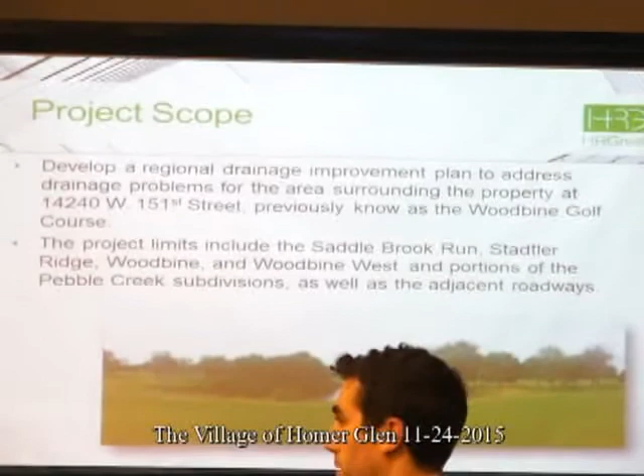So really quick, as a reminder, the project scope was to do a regional drainage study through the area surrounding the former Woodbine golf course. This included the subdivisions of Saddle Brook Run, Stadtler Ridge, Woodbine, Woodbine West, and portions of the Pebble Creek subdivision, as well as the adjacent roadways. So within the entire village, this is where we were studying, and more focused in, we're studying these subdivisions. It's important to note that these two streams here are part of the Long Run Creek watershed.

So as part of our project, we did a lot of background research to determine the extent of flooding, and just how frequently it was happening, how bad it was. We did this by meeting with village staff and the road district. We also looked at photos that were supplied by the village and road district as well as residents. We reviewed available topographic data to determine the areas draining into the study area. And then we also sent out a resident questionnaire.

I believe we sent out approximately over 450 questionnaires, and we received about 33% back. And for studies of this nature, that is basically unheard of. 10% is a good percent. We got a lot of return on this, so it's definitely worth doing the resident survey.

And then we also held a public meeting where residents were able to come in and ask questions about their specific properties or bring up ideas of how we could solve some of these drainage issues. All this information was used to generate a hydrologic and hydraulic model, which we used a computer program called XP SWMM to model the watersheds and determine how flooding was actually occurring.

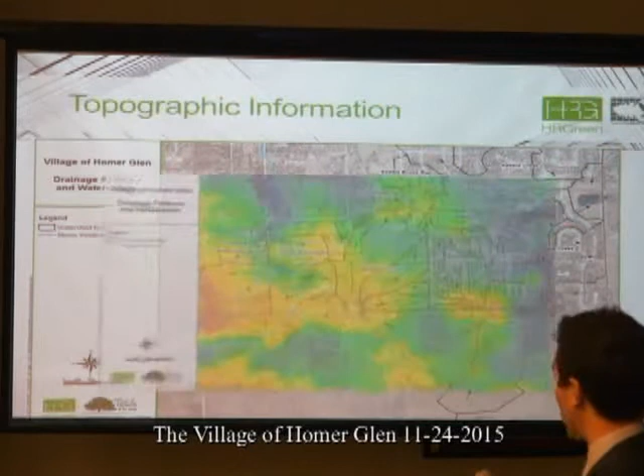We've presented this image before, but this is just showing the study area with elevation depicted as color. The orange and yellow are the high areas, and then as you go down, you get the green and blue areas, and that just shows you the relief throughout the study area.

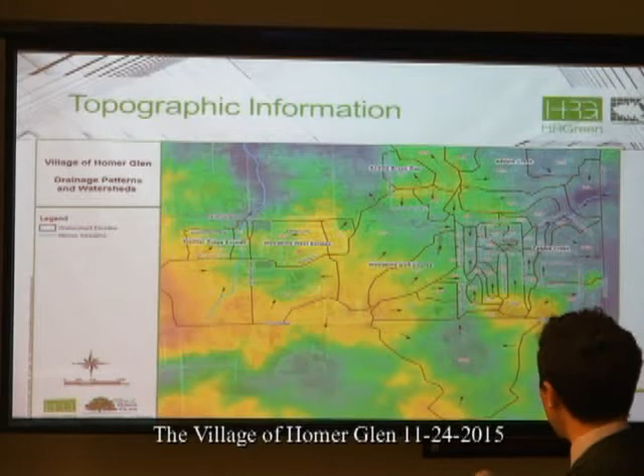So, as a reminder, we've presented this before, but there are really three ways to manage stormwater. The first is to convey it. This is to put larger pipes in the ground to open up ditches and swales. You can also detain it. This is where you store water in a detention pond and release it slowly so that your conveyance system can manage the flow that you're releasing.

And lastly, you can infiltrate it. Now this is the use of rain gardens or naturalized detention basins in which you actually will soak water into the ground rather than conveying it directly to a stream. This can be useful for smaller events where rain isn't that intense. You can actually hold the water and rely on it to infiltrate into the ground. However, we did a soil study for the area, and there's a lot of clay in the ground, and clay does not readily infiltrate water. So for large events, infiltration will not be the solution to any of the issues out here.

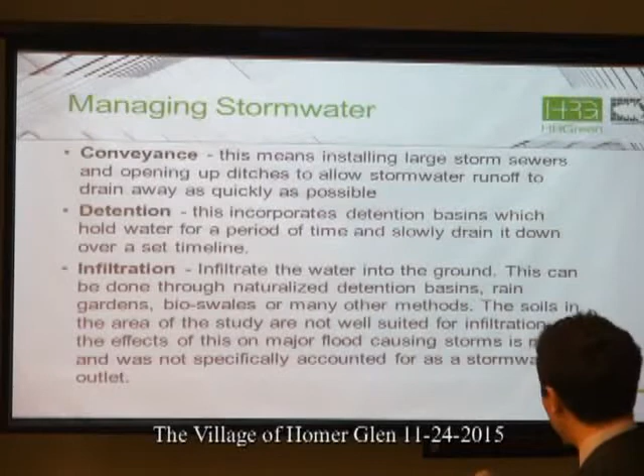So now we're going to go through subdivision by subdivision and discuss some of the improvements that we've been proposing. We're going to start out with Stadtler Ridge Estates. As I had mentioned before, from the southwest, we have a fairly large drainage area of agriculture, and it's draining basically through the subdivision to the northeast. It's, I believe, 58 acres. It's 58 acres draining through a subdivision that most likely was not designed to have that flow go directly through it.

Now, field tiles are pipes that were most likely installed before any of these subdivisions were here. They're put in the ground and they're meant to drain groundwater. Over time, people will tie inlets into them and use them as a storm sewer, but in reality, these were most likely installed to drain agricultural land. Now, agricultural land, if it rains and there's water stored on the surface for a day or two, it's not really bothering anybody.

But when you build homes there and rely on that to drain everything out, if you have water standing in people's yards for a few days, or potentially flooding the structure, that's not the best way to drain your areas. It's not very reliable. So something that we've been proposing is to take that drainage area from the southwest and actually bypass it around the subdivision.

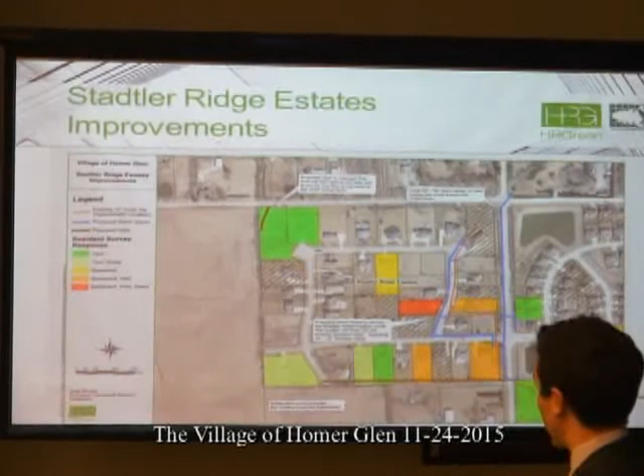Now, you may be thinking, why can't we just increase the size of that drain tile? We are able to actually improve the drain tile within the village's right-of-way. However, if it's on private property, it is up to the private property owner to maintain that pipe. So to really make this something that the village can rely on to drain the subdivision, we're proposing installing something entirely within the right-of-way so that we have rights to it, to maintain it, and just to make sure it's functioning properly. We believe that this will address most of the drainage complaints that we received throughout the Stadtler Ridge Estates subdivision. Next, we're going to move on to the Woodbine West subdivision.

And additionally, downstream of there, we have a section of drain tile that is within the village's right-of-way, the road district's right-of-way, that can be improved upon, but everything on their property would be their responsibility to improve. So we are able to actually make modifications to this basin or modify the drain tile downstream. And this should improve things for that property owner.

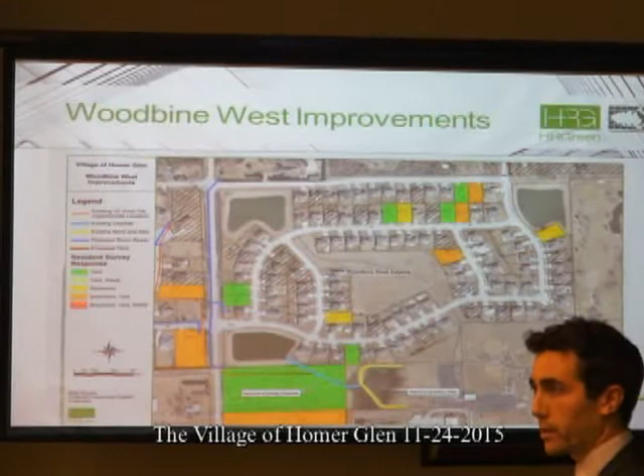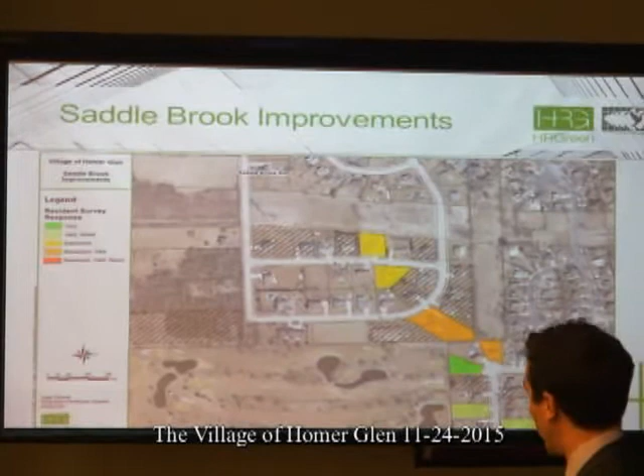The next subdivision was the Saddle Brook. This is another very high area, and all the reported flooding through here had to do with sump pump failures. So again, we did not propose any improvements here. Through studying the drainage system here, it appears to be functioning fairly well.

And this leaves the Woodbine subdivision. This has the largest area draining into it and did have a very high rate of response from the residents during their survey. So because this was such a complex drainage area with large watersheds draining into it, we used a two-dimensional XP SWMM model here.

Now this is a computer program that takes all of the storm sewer system and links it to a 3D surface in the computer. So anytime the storm sewer or ditches become overwhelmed, it'll actually let the water overflow onto a 3D surface so that we can map how far flooding actually occurs, how deep it gets, and how long it stays on the surface.

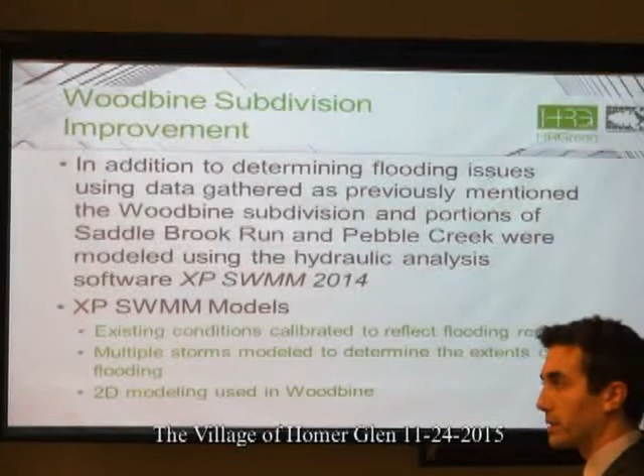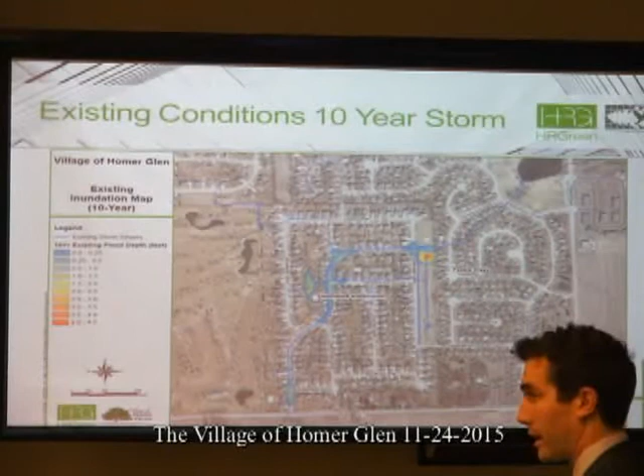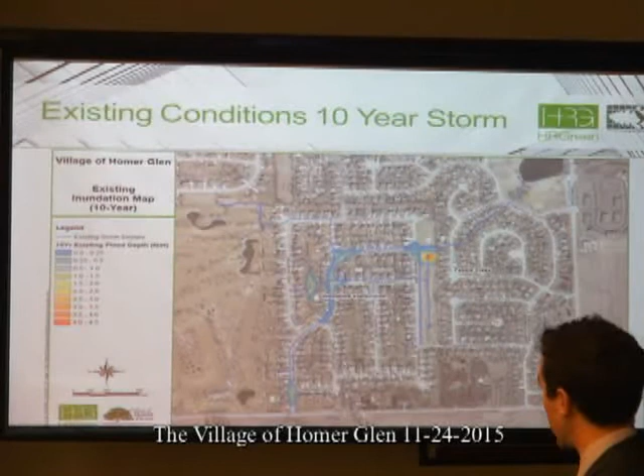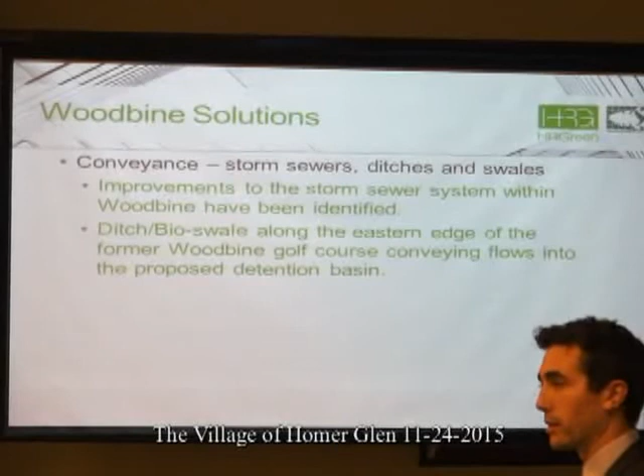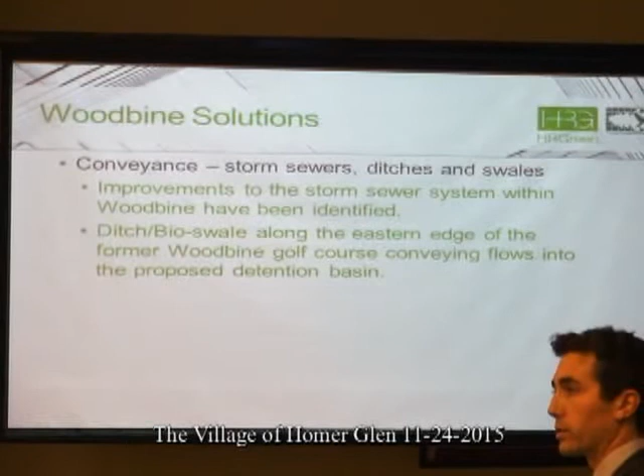So, our solutions, as I mentioned, infiltration with heavy storms in the soils that we have is not really viable. So we looked at conveyance and detention. Through a survey of the storm sewer system, we did determine that there are a few locations where the storm sewer was actually constructed so that it's back-pitched, meaning it does not slope downhill. Water will actually have to build up in the pipe before it can drain down. So we noticed that in one location that is actually a pretty big issue.

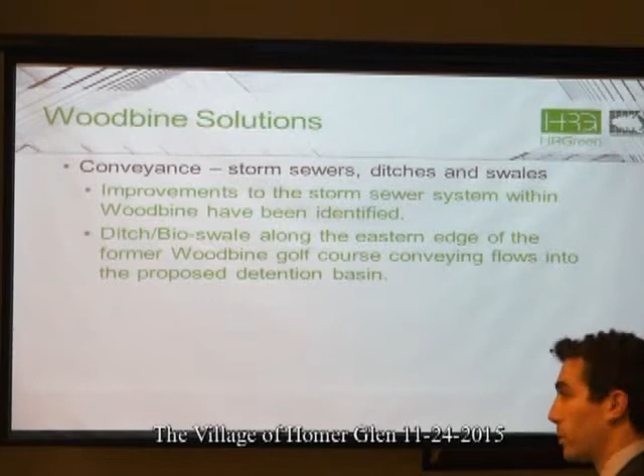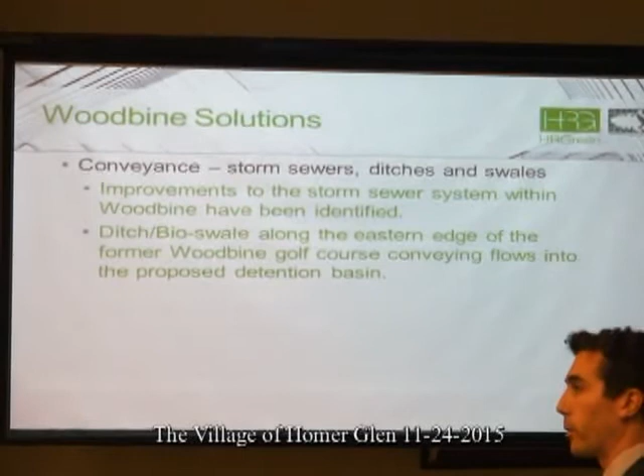We did notice that some of the sewers appear to be undersized, and we did also get a lot of complaints from residents who lived immediately along the former golf course, saying that the golf course just sheets into their backyard. They have kind of undefined flow entering their backyards. So something that we're proposing there is potentially a bioswale to direct flow out of their yards. A bioswale is just a ditch that's planted with native plants. They're actually very visually appealing, and they help a lot with water quality. I'll talk about that a little bit more in a moment.

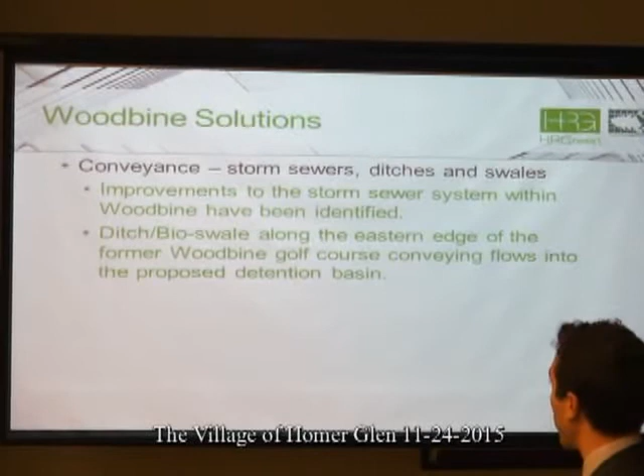The second thing is detention. There's a lot of open space on the former golf course. So we're proposing installing 2 detention basins, and these would be a naturalized detention pond. And that's planted with plants that are native to the state of Illinois, and they have a very deep root system. Now, this is beneficial because those roots go down into the clay soils, which don't readily infiltrate water, and they can actually break it up and make it so that more water will infiltrate into the ground than it currently does.

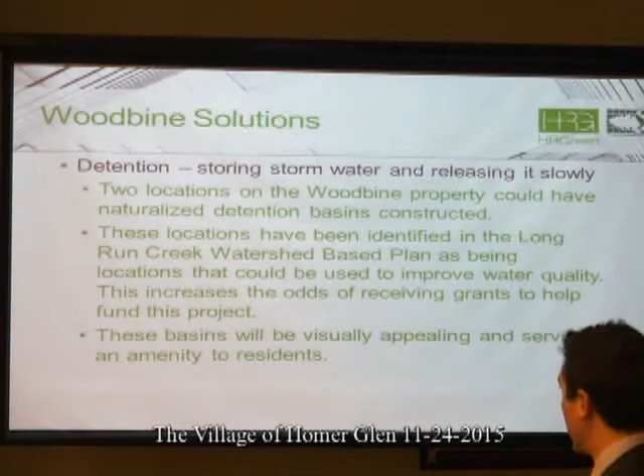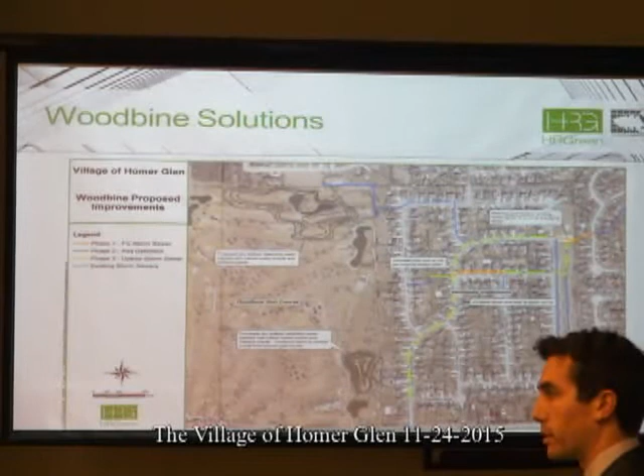Now, I'm going to go through just really quick how our solution will look in the Woodbine area. We're proposing a phased approach. The first phase will be to fix the undersized storm sewer and some of the back-pitched pipes. Now, those are the pipes in orange here, right through Center Park, connecting into Pebble Creek. And along Continuing Lane here, there are some sewers that were actually installed undersized, it appears. So doing that is a smaller project that can be done rather quickly, and that will drastically bring down the amount of flooding that we're seeing.

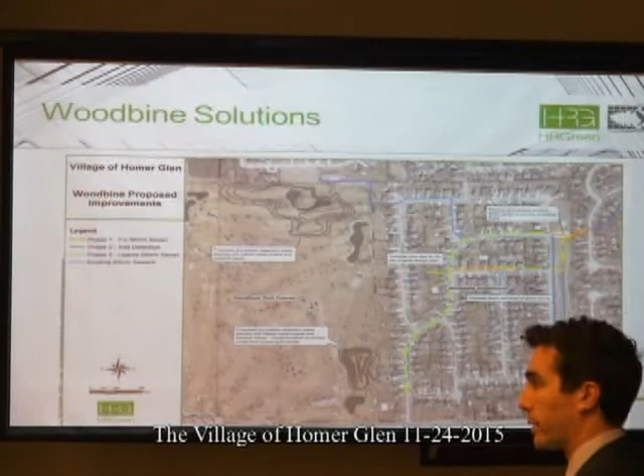Phase 2 is that we're proposing installing the naturalized detention basins in the former Woodbine golf course. That would be approximately this footprint and this footprint down here, and we have better images of these later on. And then the third phase is essentially an overhaul of the main trunk sewer through Eagle Ridge Drive here, and that's the green dashed line. That would be removing the existing storm sewer and replacing it with larger pipes to fully convey the 10-year storm. Those pipe sizes vary from 18-inch up to 48-inch in diameter.

So on the golf course property, these were the footprints of the naturalized basins that we were proposing. This is what we worked with Applied Ecological Services to develop. And these areas were noted in the Long Run Creek Watershed-Based Plan as locations that can be improved upon to improve water quality in the watershed as a whole. Now this is very important because that allows us to apply for funding to actually have these basins constructed.

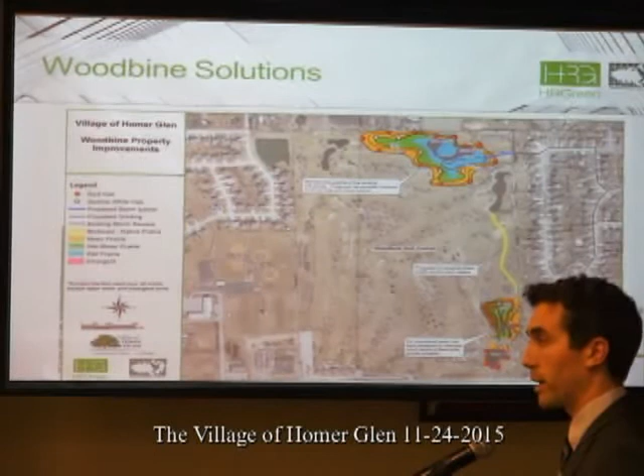Now, the fact that the Long Run Creek watershed-based plan has been approved by the IEPA means that we're eligible for a type of funding called the 319 grant, which can help quite a bit with funding projects like this. We've, in the past, received about 80% of a project paid for by the Illinois EPA.

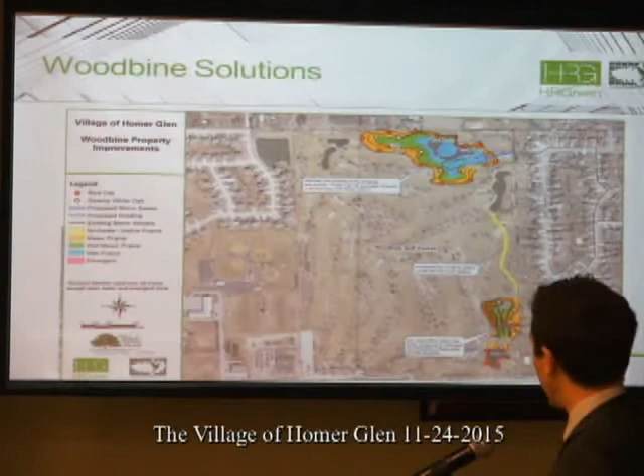It's also important to note that the existing open water that is out there, with the golf course hazards right now, they will be maintained. They can remain there. It's not like we're going to be digging them up and draining them out or anything. So we'll still have open water out there, and those ponds can actually be expanded upon as part of the park improvement. These basins can actually be used as an amenity in the park.

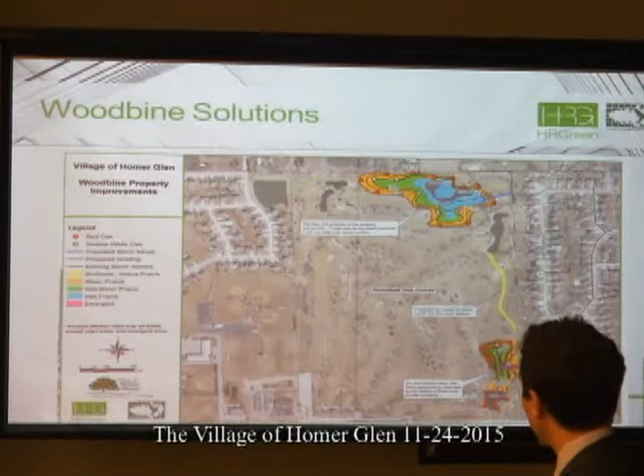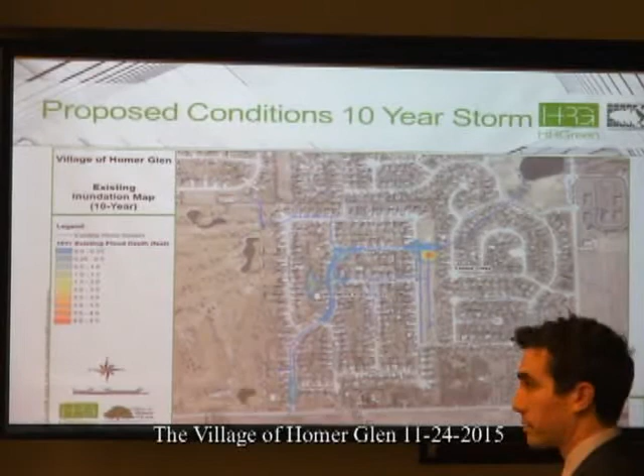So the big question is, what is this going to do for the flooding in the subdivision? Now, just as a reminder, this is what the existing 10-year storm is doing, and this is what a storm sewer should be designed to handle. We've got all the flooding through the intersection of Kentucky and Eagle Ridge, and at the intersection down here. Through doing the phase 1 improvement, we're able to bring down flooding pretty dramatically through this intersection and reduce the footprint of flooding here. This actually brings it down so it's primarily within the roadway, but we still have a little bit of backyard flooding here.

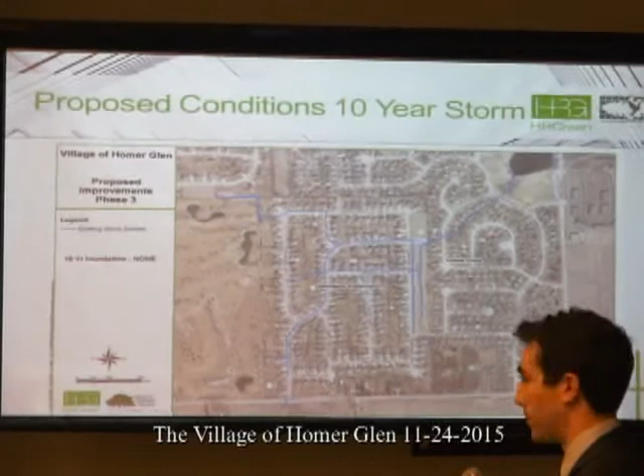Now, again, phase 1 improvement was just replacing the pipe right through Center Park here and a small portion through Kentucky Lane. Phase 2, adding the detention basins out in the golf course, we further reduce the footprint of flooding during a 10-year storm. And then by doing the phase 3 improvements of replacing the storm sewer, we can have no street flooding at all.

So the next steps are for the village to review the report. We've completed it and supplied copies of the report. You can review the recommendations and determine which projects you would like to move forward with. From that point, final design and construction documents will need to be prepared prior to anything actually going into the ground. But we would expect construction to begin as soon as funds are available, because these projects will definitely improve the drainage conditions out there. So with that, are there any questions?

Yeah, that's a great report. Thank you. Very thorough. The presentation you had for hearing, a lot of this information was there, and I did pick your brain a little bit, answer questions. To this point, you haven't done any soil sampling at all yet, right? No, we use something from the NRCS. It's a web soil survey, and you can go in and look at an area of interest, and it will give you all the hydrologic soil classifications.

Through this area, they're considered type D soils, and that's actually the worst for infiltrating water. That means that a lot of the rain that falls on it will actually run off, similar to a parking lot.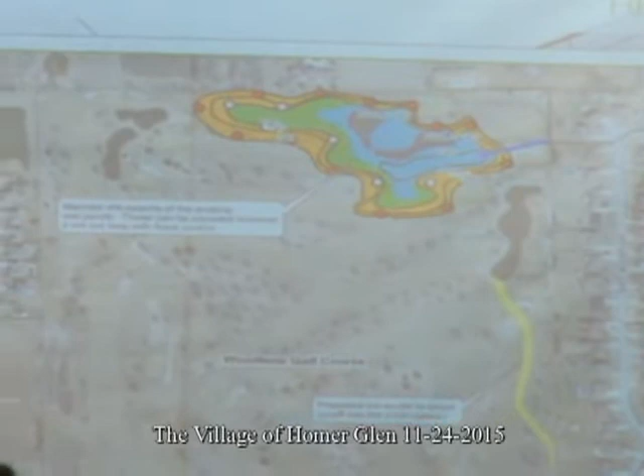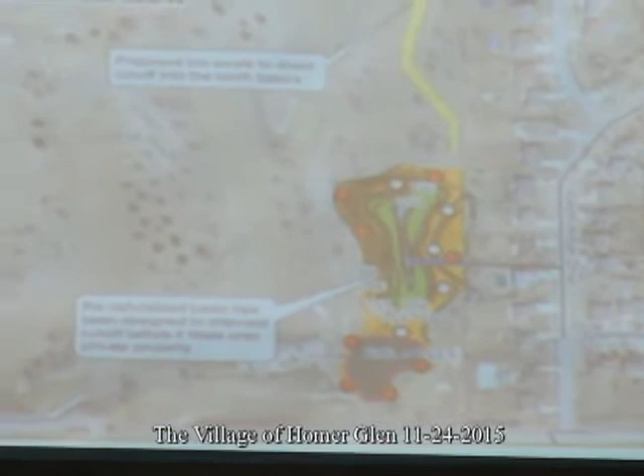So we're discussing this basin down here. What happens right now is that when it rains, this portion of the golf course drains into this retention pond, and then when this overtops, it flows directly at the homes right here. Now, what we'd be doing is modifying the overflow point for this retention pond, the open water, so that it would overflow into this detention basin. This would eventually be a dry bottom basin, but for approximately 48 hours after a storm, it would hold water in the bottom of it and slowly drain it into the storm sewer system, and then eventually along Eagle Ridge Drive through the subdivision. Both of these were designed to maintain the existing footprint of the wet ponds, and then to eventually become a dry bottom pond again.

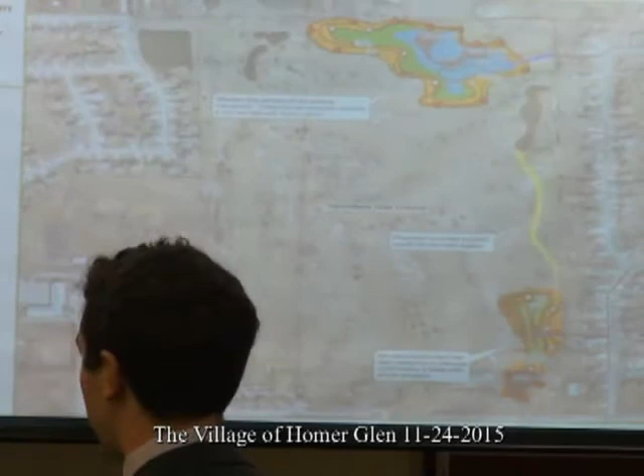As we had discussed a little bit on the side, these ponds can be expanded as part of the park, and they won't harm the performance of these basins. If the village would like to excavate more to make these larger ponds, that can be done, and it won't affect the performance of the basin at all. Okay, that was going to be my next question. So one of the potential amenities we've discussed is a fishing pond or something of that nature, and that can be expanded upon. Yes, it's discussed in detail in the report, along with some recommendations as to, if these ponds are expanded, how to maintain water quality in the park.

The bioswale that we're talking about, that's all on park property, right? That's not an easement, that would all be park property? Yes, it's this yellow strip right here. What's happening is this portion of the golf course is actually draining right along the property line and getting into these backyards here.

By putting this here and directing it into one of the existing open ponds there, we'll stop that flow from entering all the private property and keep it on the golf course, and then actually force it into the detention basins so they can be stored and released slowly.

And what's the approximate width of something like that, of a bioswale like that? The top width is normally about 20 feet. They can be made narrower, but we would like to keep them a little bit deeper, probably 2 feet deep from the top where it ties into the existing slope to the very bottom.